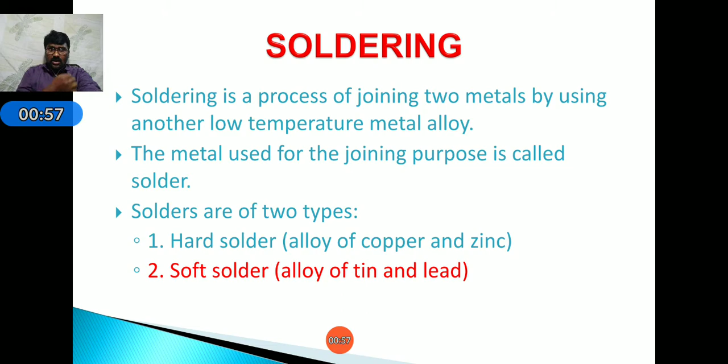Solders are mainly divided into two categories: hard solder and soft solder. In hard solder, an alloy of copper and zinc is used. In soft solder, an alloy of tin and lead can be used.

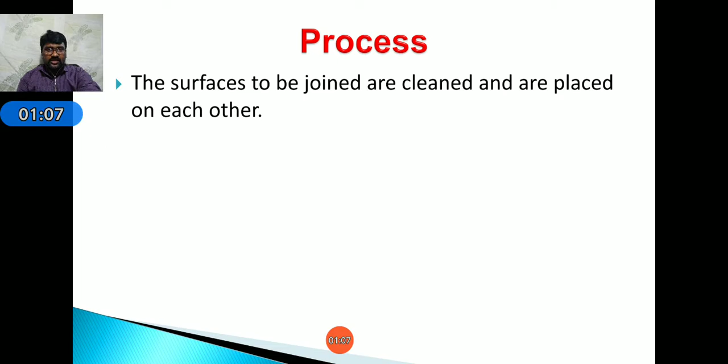Coming to the process: the surfaces to be joined are cleaned and placed on each other. Then a flux is employed to prevent oxidation, like zinc chloride, which is commonly used for this purpose.

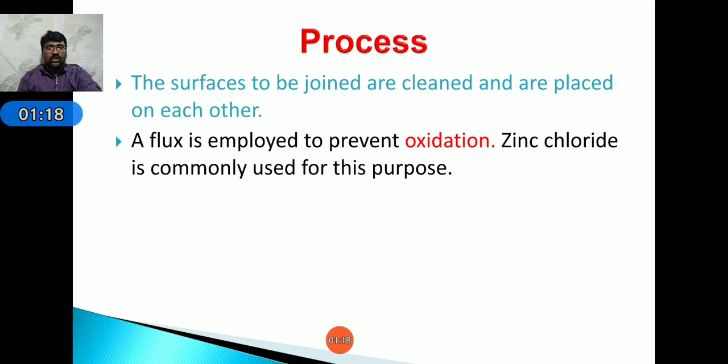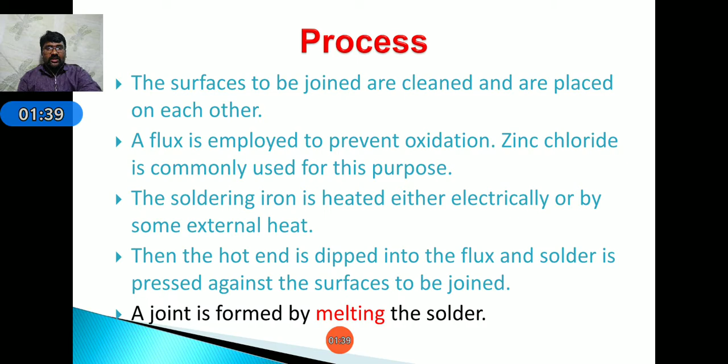The soldering iron is heated either electrically or by some other external heat source. Then the hot end is dipped into the flux, and the solder is pressed against the surface to be joined. A joint is formed by melting the solder.

In TVs, computers, monitors, and radios, electrical circuit boards are joined with resistors or capacitors using this process. The lead from a component and the copper pad on the board are joined using the soldering wire, the same material.

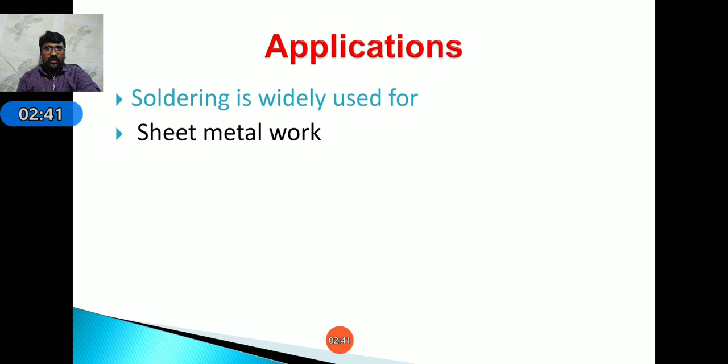Coming to applications: soldering is widely used for sheet metal work, radios, television work, and for joining wires and cables.

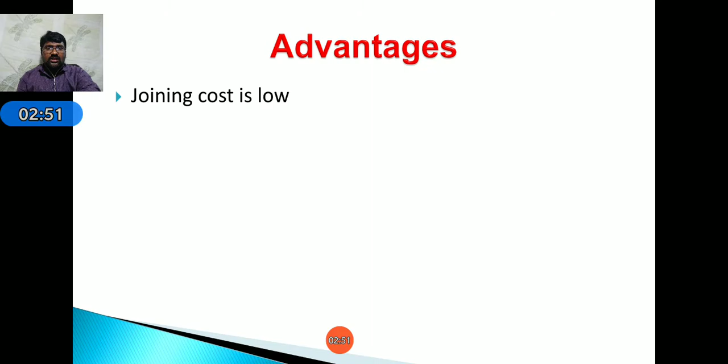Coming to advantages: the joining cost is low, the equipment is simple and cheap, and it gives good sealing in fabrication compared to other processes like riveting, spot welding and bolts. It is a very easy joining process.

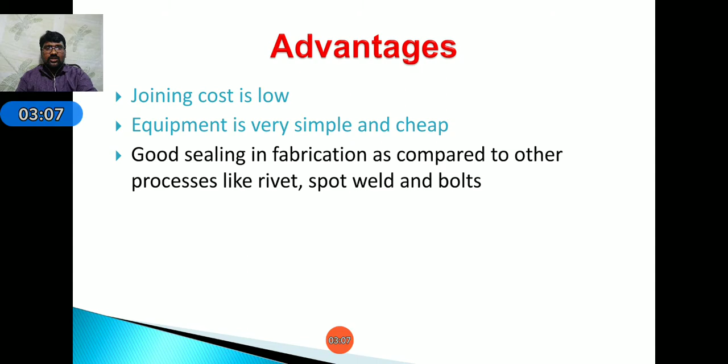It provides a positive electrical connection. Due to the low operating temperature, the properties of the base metal are not affected or changed by the effect of temperature.

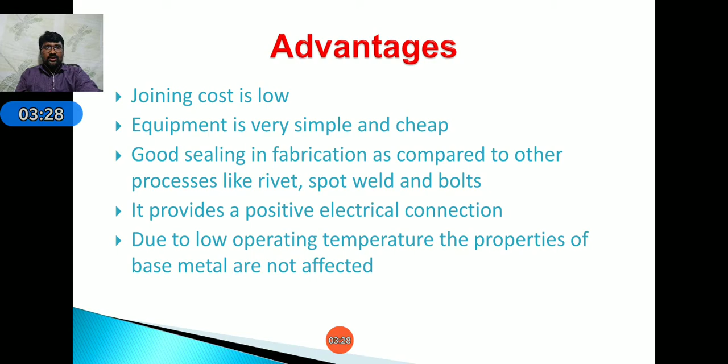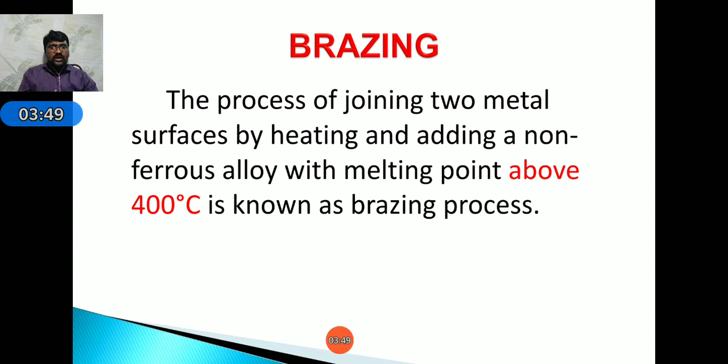Coming to the brazing process: it is the process of joining two base metal surfaces by heating and adding a non-ferrous alloy with a melting point above 400 degrees. In the same way, a joining process below 400 degrees is known as soldering.

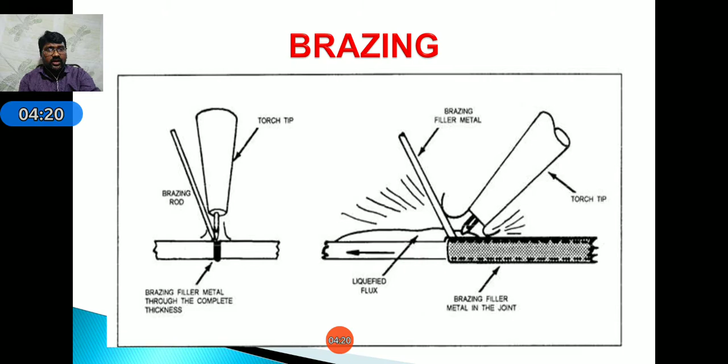Observe the diagram of the brazing process: here is the torch and the brazing rod, and the base metals. Both base metals can be joined by supplying heat from the torch and adding a filler material - the brazing filler metal, torch tip, base metals, and liquefied flux used to prevent oxidation. This is the diagrammatic representation of brazing.

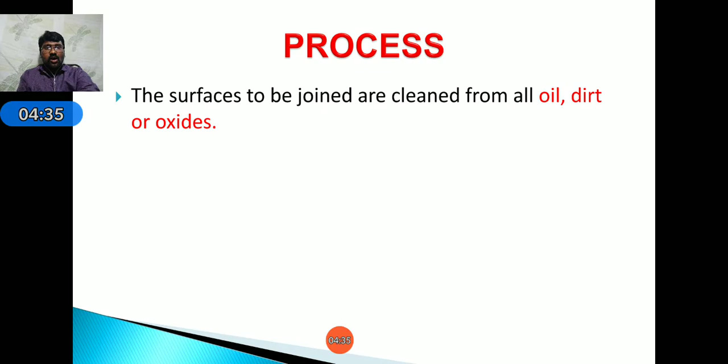Coming to the process: the surfaces to be joined are cleaned from oil, dirt or oxide before the process. Then both surfaces are placed in joining position, and the flux is sprinkled on or placed on it.

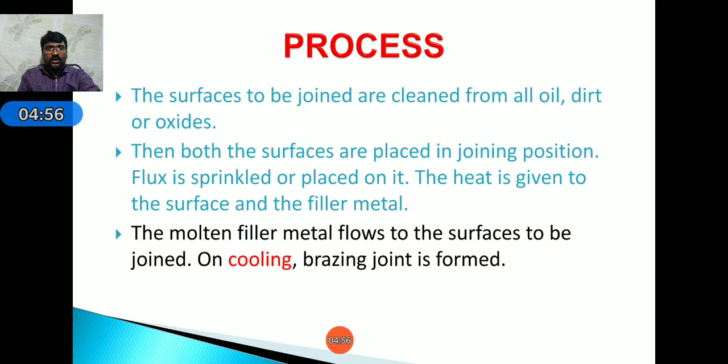Heat is given to the surface and the filler material. The molten filler metal flows to the surfaces to be joined, and on cooling, the brazing joint is formed.

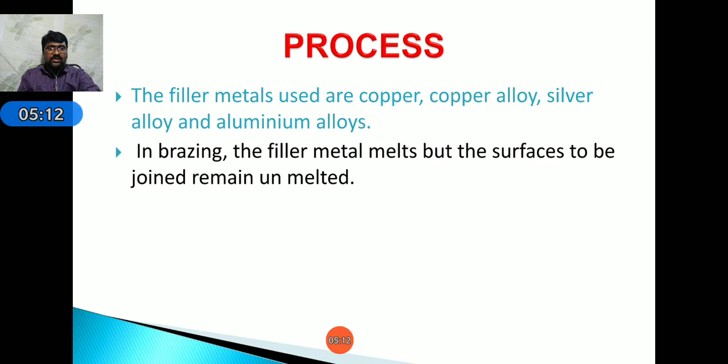The filler materials used are copper alloy, silver alloy and aluminum alloys. In brazing, the filler metal melts but the surfaces to be joined remain unmelted. Coming to methods of brazing: gas torch brazing, furnace brazing, dip brazing, and electrical brazing.

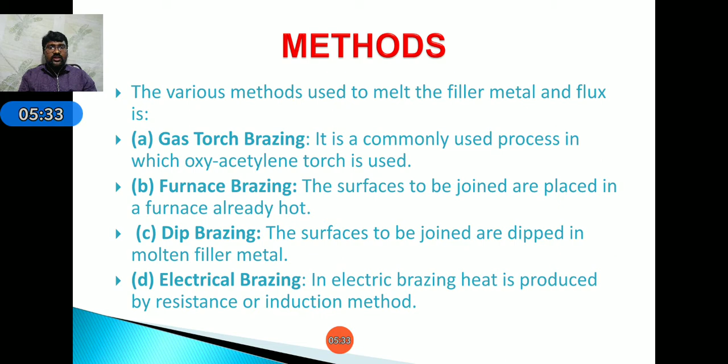Okay, these are the different types of brazing. Torch brazing is a commonly used process in which an oxyacetylene torch is used, where heat is provided by mixing oxygen and acetylene in a proper ratio. Next, furnace brazing.

The surfaces to be joined are placed in an already heated furnace, such as an electrical furnace. There are different types of furnaces. Next, dip brazing: the surfaces to be joined are dipped in molten filler material.

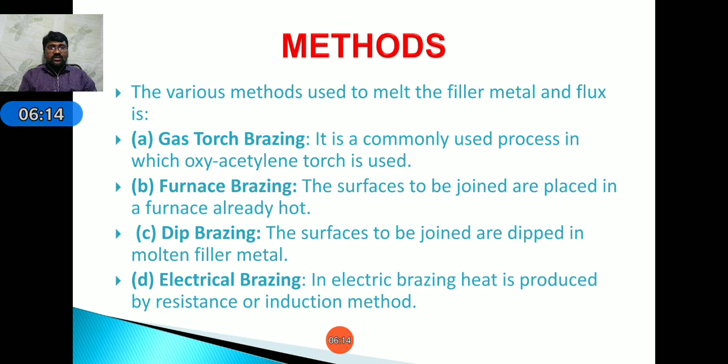Next, electrical brazing. In electrical brazing, heat is produced by resistance or induction heating. Based on this heat energy, there are different methods of brazing.

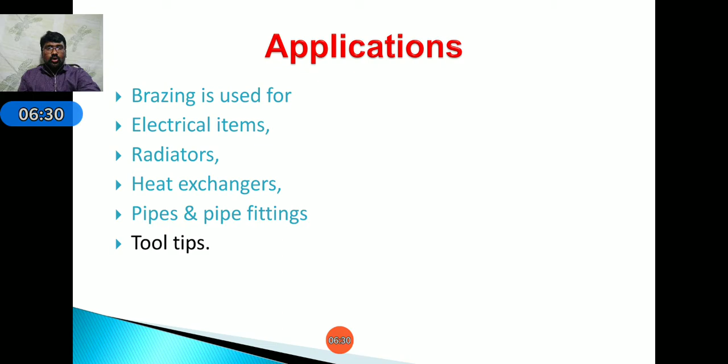Next, coming to applications of brazing. Brazing is mainly used for electrical items, radiators, heat exchangers, pipes and pipe fittings, and tool tips. These are the different applications.

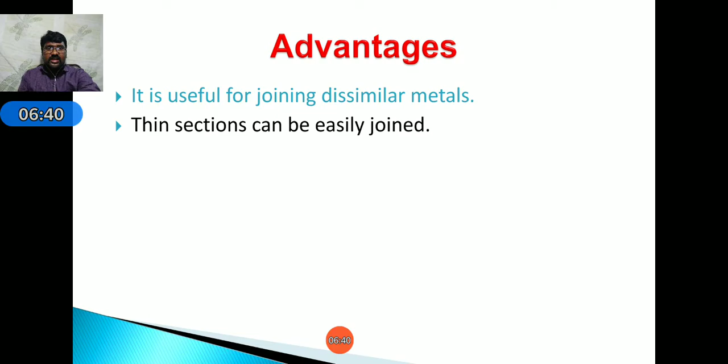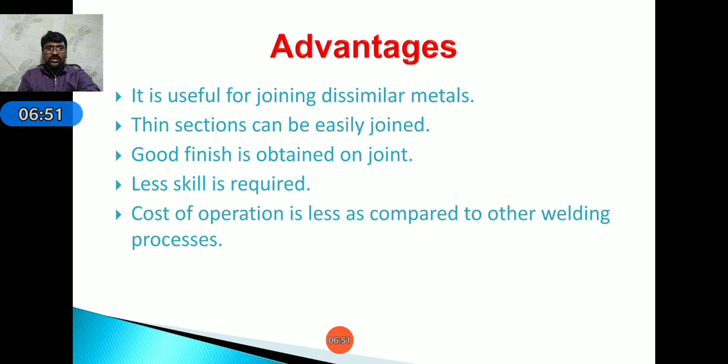Next, coming to advantages: it is useful for joining dissimilar metals. Thin sections can be easily joined. Good finish is obtained on the joint. Less skill is required. Cost of operation is less compared to other welding processes. These are the different advantages.

Next, coming to disadvantages: low strength, and it is not applicable to hardened steel and aluminum alloys.

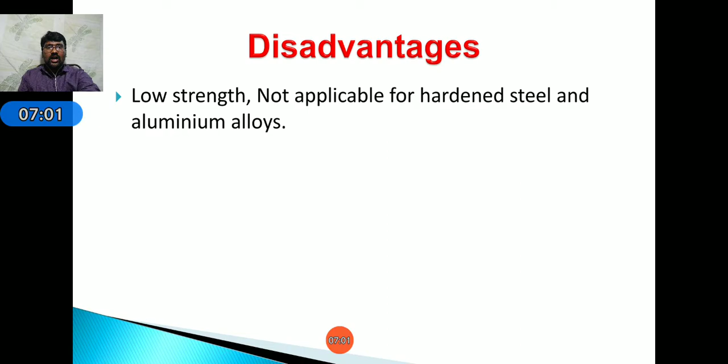Next, coming to the difference between soldering and brazing. The first one is, here the filler material has a melting point above 400 degrees, which is known as the brazing process. Next, the filler metal has a melting point below 400 degrees centigrade, which is known as soldering.

Next, coming to the second difference: more stable joints can be made using the brazing process, while less stable joints are made with soldering. That is, the strength of the joint is more in brazing and less in soldering.

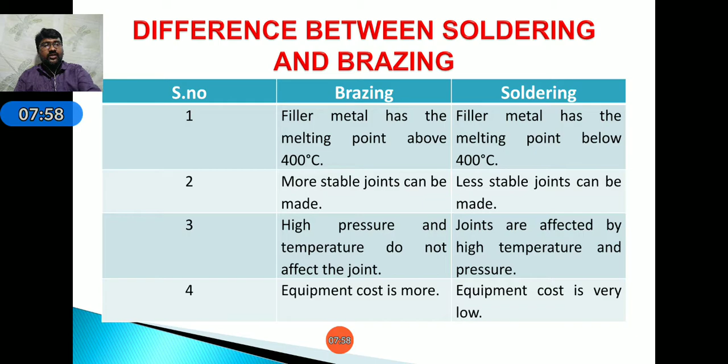Next, high pressure and temperatures do not affect the brazed joint, while joints made by soldering are affected by high temperature and pressure. Next, equipment cost is more in brazing, and equipment cost is low in soldering. These are the main differences between brazing and soldering.

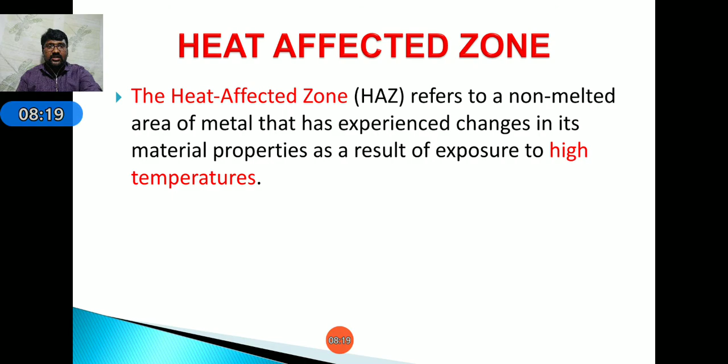Next, coming to heat affected zone. The heat affected zone refers to a non-melted area of metal that has experienced change in its material properties as a result of exposure to high temperature. The alterations of material properties are usually a result of welding, high heating, or cutting procedures.

The heat affected zone is identified as the area around the weld or cut in the base metal. Due to the welding or cutting action, heat is developed in the material, and due to this, the properties of the material change.

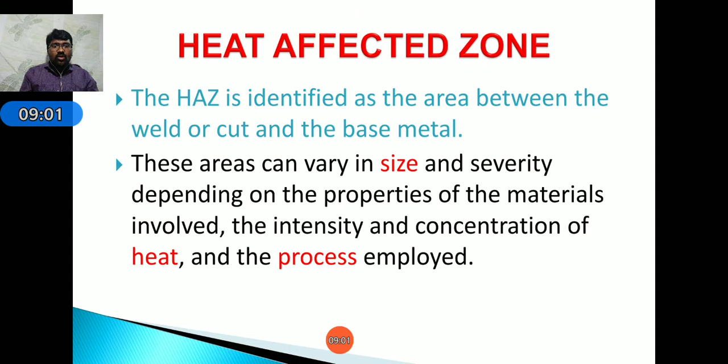These areas can vary in size and severity depending on the properties of the materials involved, as well as the intensity and concentration of heat and the process employed.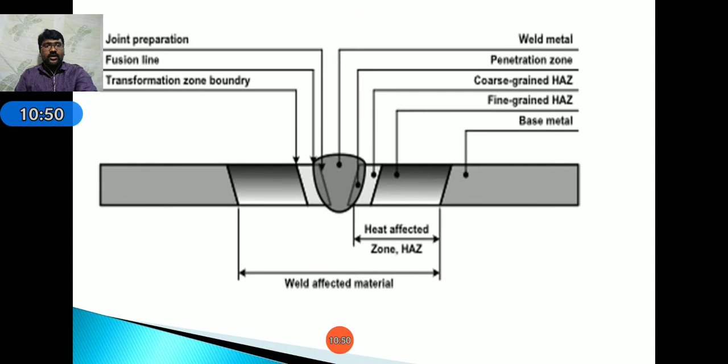Next, what are the different causes of heat affected zone? During welding operations, the heat affected zone may range from small to large depending on the rate of heat input. For example, in case of soldering, the heat affected zone is very less. In case of TIG welding or plasma arc welding, the heat affected zone is very high compared to these. It also changes based on the type of base metal and material properties, and these characteristics of the material will change the severity of the heat affected zone.

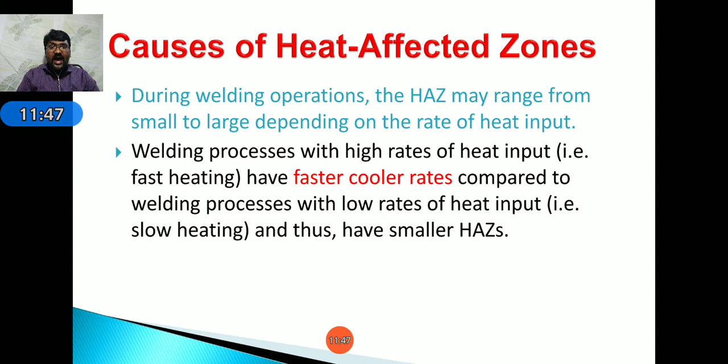Next, welding processes with high rates of heat input, that is fast heating, have a faster cooling rate compared to welding processes with low rates of heat input, that is slow heating, and thus have a smaller heat effect zone.

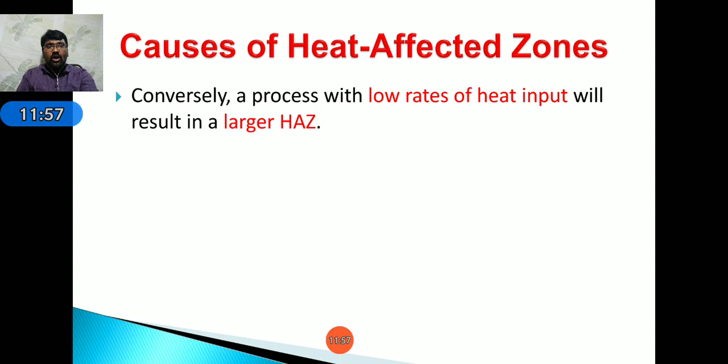Conversely, a process with lower rates of heat input will give a larger heat affected zone. The size of the heat affected zone also increases as the speed of the welding process decreases, because more time we are supplying heat at that point, so the heat affected zone will be increased.

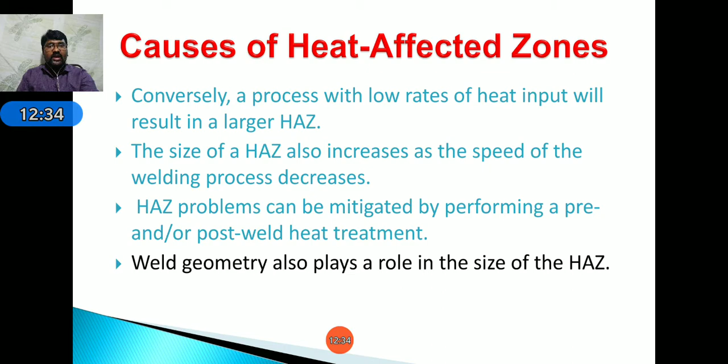Next, heat affected zone problems can be mitigated by performing a pre and post weld heat treatment. Before or after welding, we have to do some heat treatment to the material. Weld geometry also plays a role in the size of the heat affected zone.

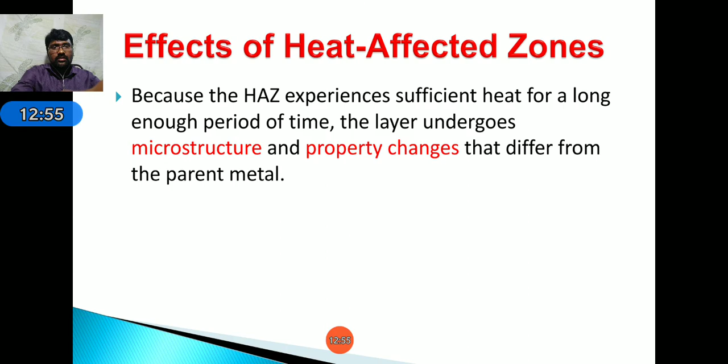Next, the effect of heat affected zones: because the heat affected zone experiences sufficient heat for a long enough period of time, the layer undergoes microstructure and property changes that differ from the parent material. These property changes are usually undesirable, and the heat affected zone ultimately becomes the weakest part of the component.

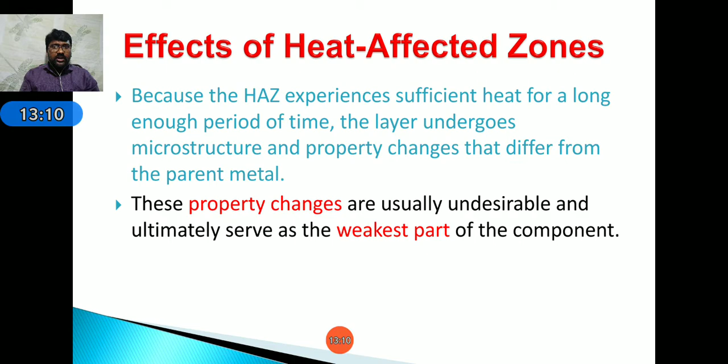For example, the microstructural changes can lead to residual stresses, reduced material strength, increased brittleness, and decreased resistance to corrosion or cracking. As a result, many failures occur in the heat affected zone.

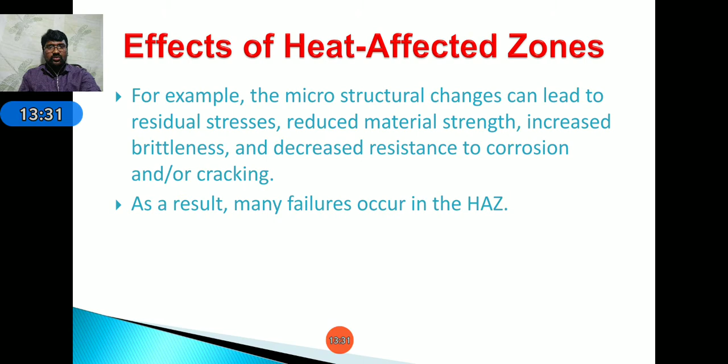Okay, this is about soldering and brazing heat affected zones. The main difference between soldering and brazing is the temperature range: if below 450 degrees centigrade, it is known as the soldering process; above 450 degrees centigrade, it is known as the brazing process.

One of the main differences is the strength of the soldering joint is less compared to the brazing joint. For thicker materials, the brazing process is used, and it is also used for joining dissimilar metals easily using brazing joints.

It is mainly used for alteration purposes; for example, if any part is damaged, it can be repaired using a brazing joint. The soldering process is mainly used to join electrical components, such as circuit boards, televisions, radios, and similar areas where circuit boards are used. It is mainly used in electrical applications.